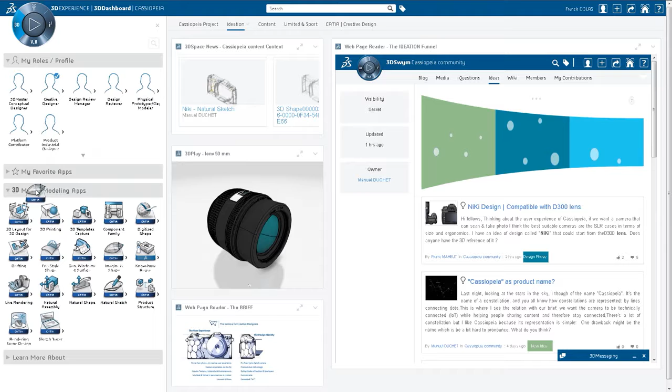All disciplines in a company and its ecosystem can participate in the creation process. Creative designers benefit from collaborative ideation and innovation capabilities, leveraging the 3D dashboard that monitors and communicates project status, design trends, inspiration walls, blog articles, and others.

This displays information from external communities that each creative designer can enrich and nourish from. In a couple of clicks, anyone can share an interesting article with colleagues or partners.

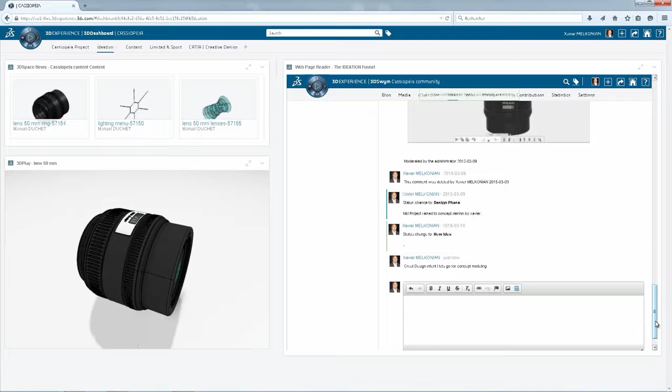All users can access and reuse 3D data from the dashboard. The 3D data can be easily viewed, explored, and even exploded to ensure clear understanding of the project.

To manage the project, an idea funnel is available, where anyone can navigate, study, compare, and challenge ideas. The size of the dot represents the number of likes made. Based on this information, managers can mature them from proposal to concept up to validation.

What if all industrial designers and stylists had the powerful instinctive tools which would allow them to focus on innovation? CATIA Natural Sketch is a breakthrough concept.

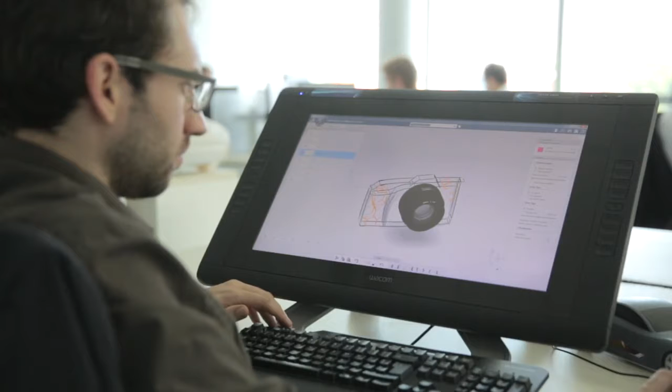This integrated 3D sketching solution allows industrial designers to create 3D sketches to express and communicate their creativity. This means they can be more creative by exploring more design alternatives.

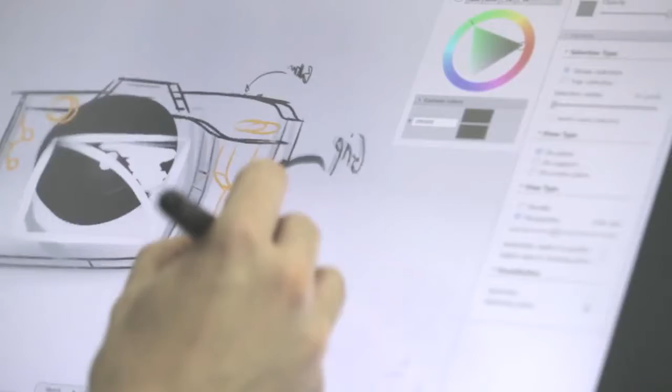This 3D sketching technology is a paradigm shift in the ideation step. It gives designers the ability to transform their 2D idea into a 3D reality and to explore detailed design variations directly on 3D objects. 3D sketching permits a better understanding of design intent, surfaces, and volumes, which avoids misinterpretation of 2D views.

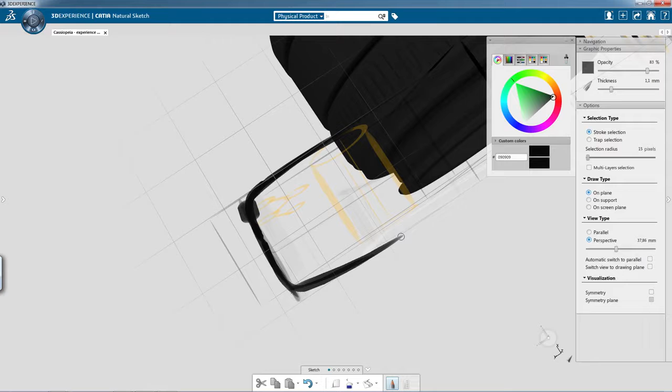Bringing together the intuitive gesture of painting and the power of realistic 3D modeling, CATIA Natural Sketch can be used at all phases of the creative workflow. This accelerates the creative process by bringing a better level of communication between designers and the rest of the team.

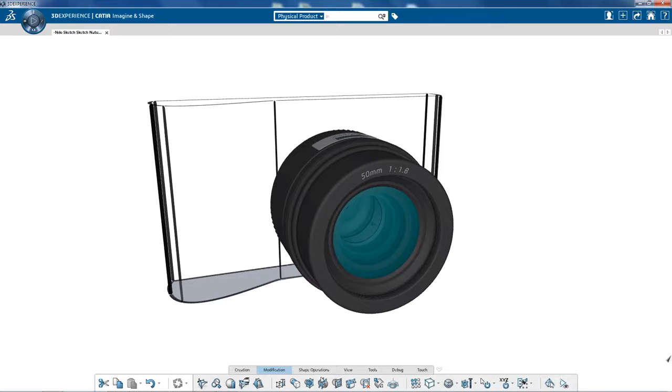What if digital modelers could easily convert any idea into a solid, high-quality model? Now, based on this 3D sketch concept, the same designer or another can enter the concept modeling phase with a dedicated workbench called CATIA Imagine and Shape.

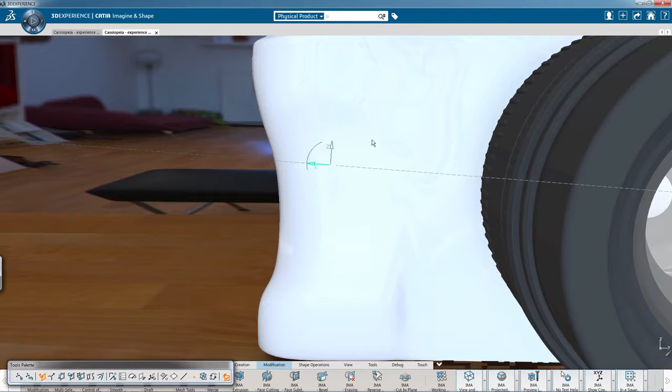Based on subdivision surfaces technology, modelers can sculpt in 3D very quickly, while keeping surface curvature continuity under control. The clay modeling type process is very intuitive and easy to learn. The geometry can be modeled just by pushing, moving, or rotating the virtual clay model.

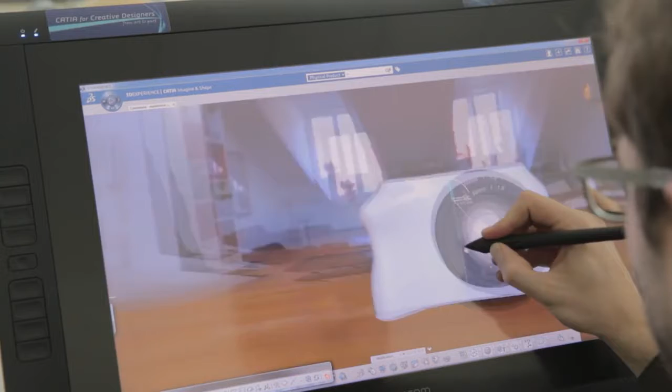This modeling approach gives a lot of creativity, flexibility, and freedom. By drawing curves, you can express your creativity directly in 3D until you find the right design. It's key for high-tech companies to save time exploring concept design variations and to make the right choices for volumes and shapes. Digital modelers can also sketch subdivision surfaces and preview the level of detail.

What if digital modelers and surface design experts could be on the same page? After the concept design phase is delivered to the subdivision surfaces, the project is in the hands of the freeform surface modeler. This expert in advanced surface modeling will create the final high-quality shape that represents the design intent, all while respecting the engineering and manufacturing constraints.

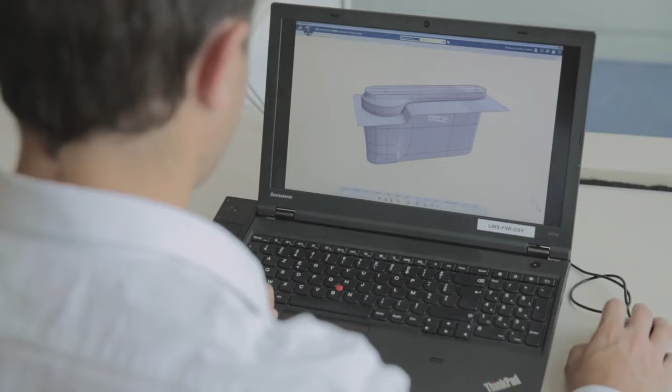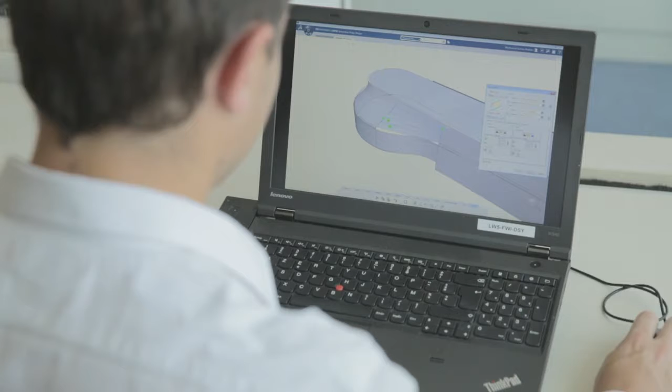The design process benefits from associativity to the original 3D sketch at all times. If we look more closely at the fading edge area, we notice that the surface quality needs to be enhanced. Thanks to direct modeling, the freeform surface modeler can modify surfaces using control points and interactive tools such as zebra highlights in order to reach a better perceived quality. It is a unique way to allow engineers to rapidly fine-tune patches while keeping associativity.

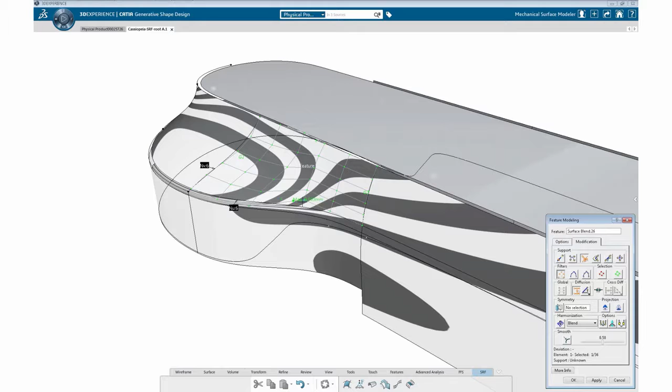Interactive analysis helps engineers assess the quality of the shape anytime during the modeling phases. This integrated approach fosters the creation of very high-quality surfaces in a minimum amount of time. This precision of direct modeling allows the user to reach a high level in terms of highlights. It enhances reflections for a better perceived quality.

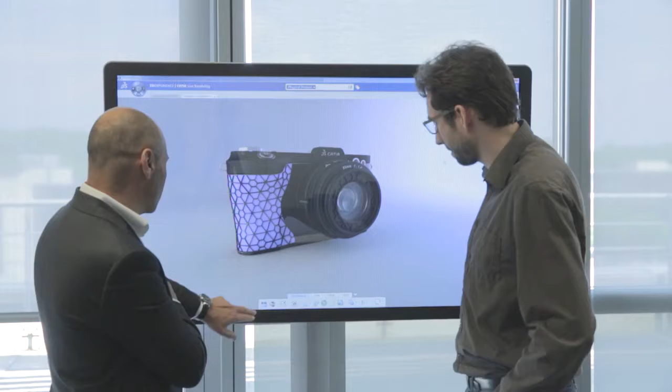What if decision makers could harness accurate information to define the best consumer experience and make the right choices? Major decisions are taken first with virtual prototypes. Having a high-end visualization and rendering solution is a strong requirement for creative designers and decision makers. They need leading-edge and accurate technologies to visualize, present, and share their design.

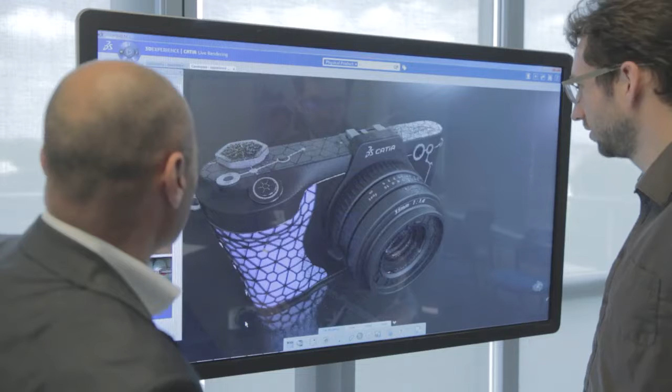CATIA Live Rendering is the integrated solution for multiple needs based on two consistent visualization modes: real-time visualization and interactive ray tracing. With real-time visualization, designers can easily explore shapes, materials, colors, and trim combinations and see interactively how light reflections interact with the material and the shape of the object. It's leveraging the modeling experience thanks to real-time visualization.

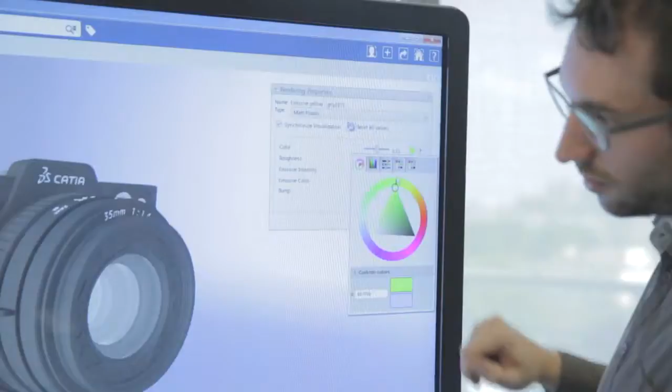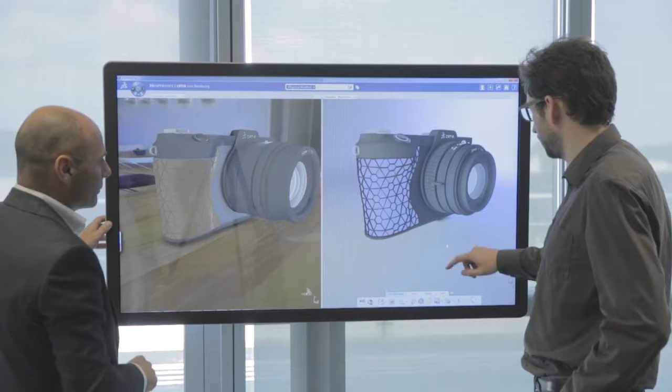And for design decision and team review, interactive ray tracing allows designers to simulate physically correct renderings. Managing lights, textures, and precise material behavior allows the user to make accurate decisions by comparing different alternatives. Rendering performance reaches such a level of interactivity that you can engage live discussions. All this without any compromise on the quality of rendering, thanks to CATIA Live Rendering Global Illumination and Ray Tracing.

Usage is based on a photographic user experience. These rendering functions can be used by designers and digital modelers at any stage of the creative workflow throughout the project. Designers and managers can now make accurate design decisions on a physically correct virtual model.

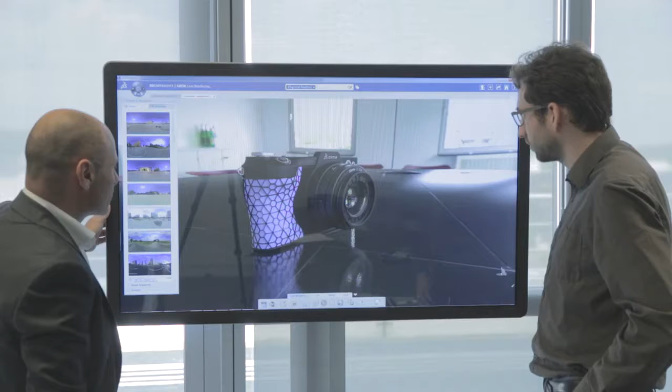Design validations are also made with physical prototypes. 3D print is used all along the creative design workflow, not only at the end of the project, but throughout the entire process to help designers make the right decisions.

Multiple prototypes can be created that use different materials. The first one is for ergonomic study, to validate by-hand surfaces and volumes at the concept clay modeling phase. The second prototype is for physical validation, to assemble and combine all complex components together, and also to study the physical complex mechanisms and usability, assembling existing parts with the new concept.

After multiple design explorations and validations, the most advanced version of the prototype is here to confirm what was decided with previous versions. To reach success, decision makers need a range of tools and technologies to be able to make the right choices.

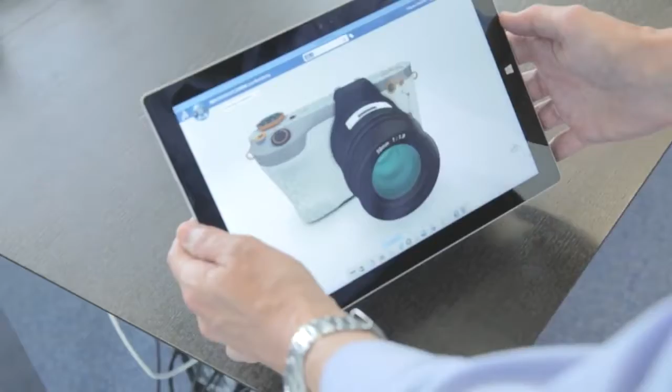Now with immersive and augmented reality, we can mix virtual and physical prototypes together. First, to walk around your model as in real life with your tablet sensors, and second, to experience your product by combining the real world and the digital model by tracking a target.

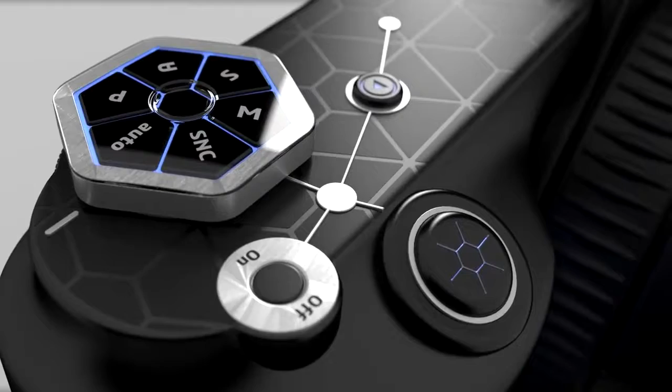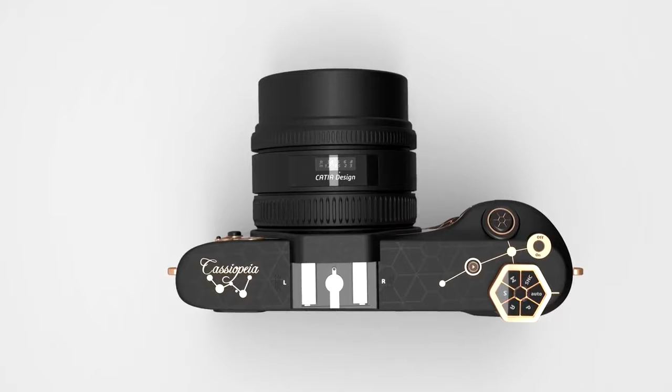In conclusion, Dassault Systemes has developed a unique approach to social ideation and creative design. This unified industrial design workflow solution is tailored for high-tech creative designers who need to imagine, create, manipulate, explore, and validate more ideas. Design teams can create the right design faster by harnessing accurate information and correctly predicting the customer experience.